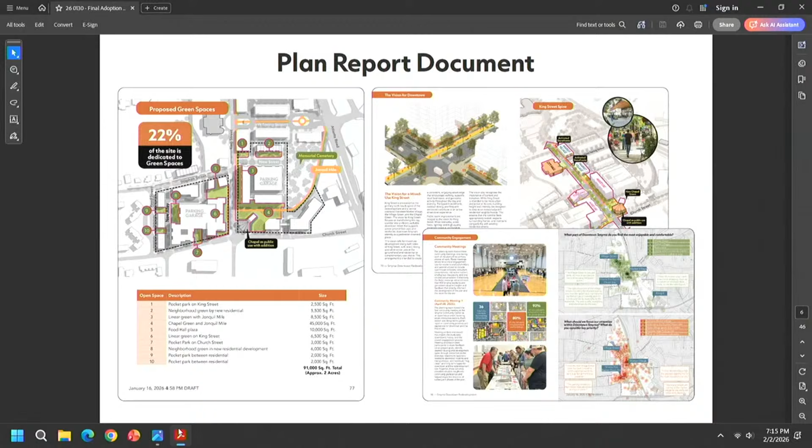The plan is very graphic. All of the graphics I'll show have additional information in this report, going into greater detail on the types of things I'll discuss at a higher level today. I think one of the main things about this plan, and honestly one of the joys in working through this process, has been the engagement process and the great reception we've had from the community.

We held 3 community meetings, all at the community center. The first meeting alone had 250 people. We had about 200 at the second community meeting, and 150 at the third. We also had a project website, Downtown Smyrna Redevelopment. Over the life of that website, we had about 13,000 unique visitors who visited the website about 20,000 times.

We also held interviews and roundtables with stakeholders - about 70 stakeholders across 15 focus group meetings. We did 2 online surveys with about 3,200, almost 3,300 responses total. The first survey alone had 2,000 responses. These are huge numbers for online engagement.

One of my favorite parts of this process: we had 20 project ambassadors. These are dedicated folks from the community who volunteered their time to go to community events, attend our public meetings, staff the sign-in sheets, and really become champions for the process. Some of these folks are here today, and it's been a real joy working with them. With the help of ambassadors, we attended the Taste of Smyrna and the Jonquil Festival, chatting with about 300 or so folks. So about 17,000 voices engaged in about a year of work.

So really fantastic things. Some of the engagement that I'll share today will be focused on the feedback we received at the third community meeting in mid-November, where we shared this vision for the site, and folks told us what they thought, what they liked, what they didn't like. I'll share some of the results from this last meeting. So I'm going to start by talking a little bit about the vision for the site.

As we all know, the First Baptist Church site is a fantastic redevelopment opportunity for the city. It's really a once-in-a-generation opportunity for you all to double the size of downtown. Very rarely does this type of contiguous land right next to your walkable core come up for redevelopment, and very few times do you have the opportunity to purchase it and then shape how it continues to grow.

As we think through the redevelopment, one of the things that drew us most to the site was the historic chapel. As part of your purchase agreement, this chapel is to be preserved and reused as a public use. We think the chapel is the heart of any future redevelopment. It has been part of the community for more than 100 years, and it really becomes the focus of any future redevelopment for the site.

It's what brings it its authenticity and will ground it and help anchor this district. We think there's an opportunity to do an expansion to the site that still honors that historic architecture. I'll share a little bit about how that can be placed, but really showcase and open up the chapel from what is currently a hidden back side into a future green space.

The other organizing element for this vision relies on connectivity. One of the things people told us through this process is that they do not want to see an old downtown and a new downtown. They wanted everything to feel part of a single experience. For that, we are proposing what we're calling the Jonquil Mile, though it can be shaped later into any nomenclature. The point here is a really high quality trail that is beyond a path. It is a linear green that connects the Market Village, your village green, to the rest of the site.

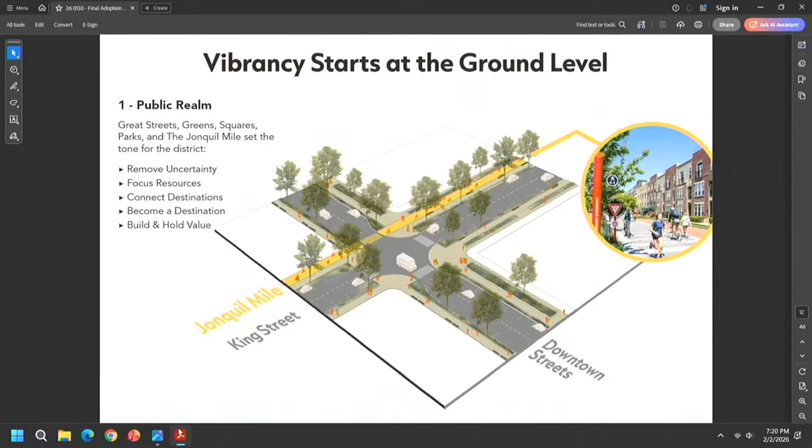And really set the tone for the redevelopment, whether your investment is in place through the Jonquil Mile. What this signifies to the development community is that you have a high-quality public realm that needs to be matched with a high-quality development. That vibrancy doesn't end at the sidewalk -- that only sets the tone. However, the vibrancy is really crucial at the ground level.

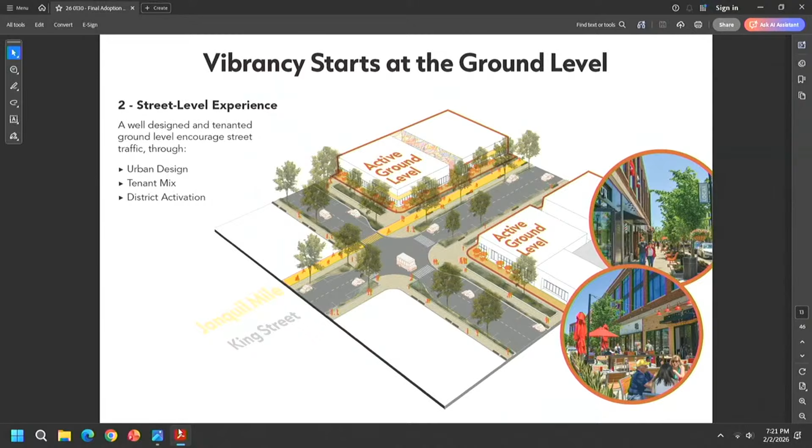And this is where you can influence the future development. You want a well-designed ground level that has a great mix of uses, has good urban design, so you have something interesting to walk to that encourages meandering. And you have to work with the development community to have a solid tenant mix that really brings in the types of businesses that the community told us they like to see, and businesses that contribute to what's already here in your Market Village, where you have a great collection of longstanding businesses.

And to make that happen, what happens above the ground level is really crucial. The development that occurs there, whether it's residential, office, or hospitality, can all be influenced by you all, but will be shaped by the market and by the development market.

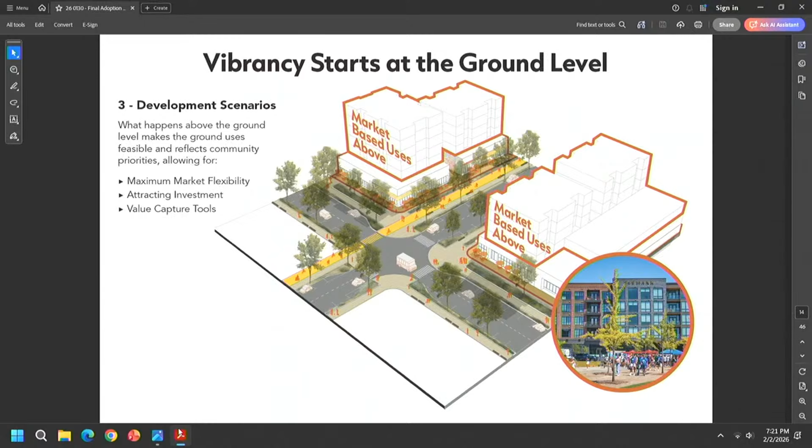And what happens there will allow for that ground level to occur in a way that you all wanted, in the way that the community told us that they'd like to see, more restaurants, more retail, and more local businesses. And we know that to get to this, you have to have a little bit of market flexibility, because people told us they want certain things and expect certain high-quality things from this development, especially after a process like this.

We heard from the community, the number one thing they'd like to see, more restaurants, more retail, making downtown a destination, bring in high-quality dining, more things to do downtown. How do you make this work?

It really is by bringing residents and housing to the site to support some of that redevelopment, make it feasible from a development perspective, have an appropriate amount of parking and a well-connected downtown, making sure that people can conveniently park here. It doesn't have to become a parking district, but it has to be convenient and easy and intuitive. And then to support the redevelopment, think through other complementary uses like hospitality or office that will support those businesses during lunchtime or during slower times when residential or visitors don't support it. And this is at the back of our head as we think through all of the designs.

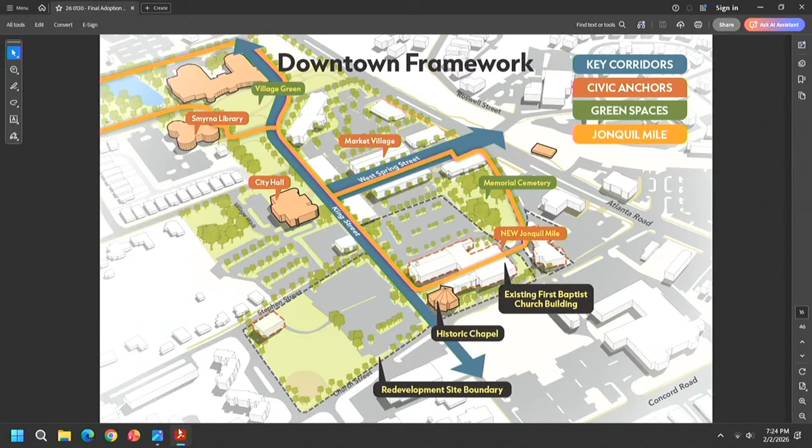All this comes together and is connected through what we're calling the Jonquil Mile, which is the line you see in orange moving through downtown. We see the investment in the Jonquil Mile going through King Street, through the heart of the redevelopment, up Memorial Place, right by Memorial Cemetery, then through West Spring Street to the Market Village, connecting the site to the Market Village, and then up King Street toward the Village Green, connecting the pond and the Arboretum back to the site. This is a connective tissue that will bring all of downtown together.

So the vision for the site is a nexus of all of these ideas coming together. It's a mixed-use spine on King Street. It's the idea of bringing the Jonquil Mile through downtown, anchoring redevelopment around the chapel through a new chapel green that's connected to the historic chapel.

All in all, the massing that you see here is conceptual. This is your starting point for you all to engage with the development community. What we're showing here represents a site redevelopment that will add about 350 new homes to downtown, about 8 to 12 businesses, a food hall with about 4 to 6 restaurants, and a hotel near the corner of Church and Atlanta that has about 120 rooms.

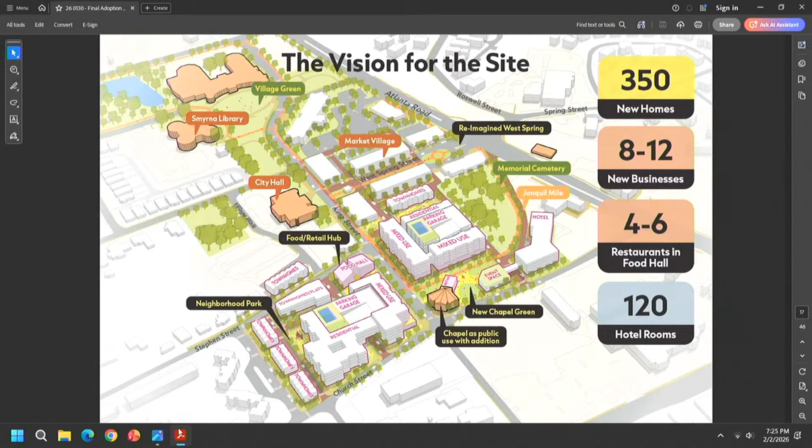So I know this is quite a big graphic to start with, so I'm going to break it down into some smaller areas and talk a little bit about what they mean. However, I know one of the key things you all want to know about, and the community told us about, is housing. So when we talk about 350 new homes, I want to be very clear that this is a mix of for-sale residential and opportunities for rent as well.

So we're showing massing that includes some townhomes, some flats, as well as some multifamily apartments. And the reason for this is the development strength that you all have here in the region to attract some of these uses.

You have really great comparable rents in the area that are supporting one-bedroom units for $1,800 or two-bedroom units for $2,100. You've got really healthy housing ecosystems supporting single-family homes or townhomes between $415,000 to $500,000. So really great comps that will signal to the development community there's a lot of opportunity.

350 homes might sound like quite a big number, but in the grand scheme of things, as you look at other developments in Smyrna, it's actually quite similar to other concepts, at a density more suitable for downtown. The Sync Apartments at Jonquil is about 290 multifamily units, and the Belmont development is about 274 multifamily units, plus 215 single-family homes. So this is not an unprecedented amount of residential to add to downtown Smyrna, but it is a significant investment that will bring a lot of new activity.

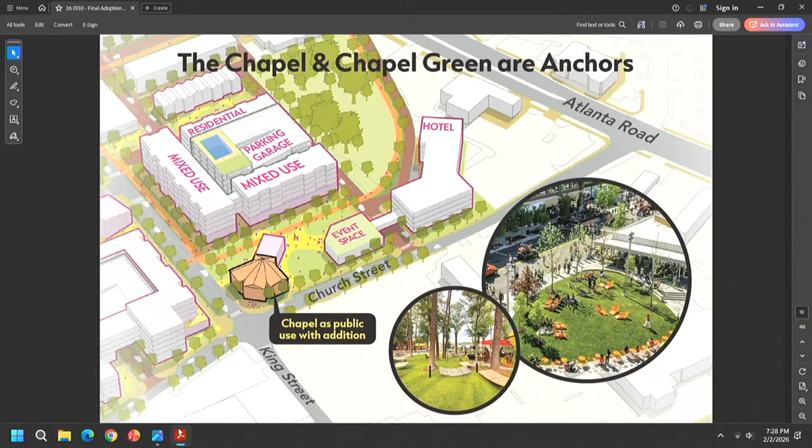All of this is centered around the historic chapel. The chapel, in our own assessment and in talking to the community, is the heart of any future redevelopment. The way we envision redevelopment happening is really opening up the area around the chapel and then focusing redevelopment around a new chapel green that highlights this historic structure, opens it up with a glassy or contemporary addition, and really becomes more of a front lawn for the redevelopment, bringing about an acre of green space. Then you can have things like mixed-use buildings with parking behind them, perhaps an event space connected to a hotel, all centered around this new investment in green space.

As we think through how this can be reimagined, our vision for this area is really opening up this portion of downtown, making it a southernmost gateway for your downtown, honoring that historic architecture with a contemporary addition that brings light and energy into the site, perhaps adding things like a coffee shop or a visitor center or some sort of business that brings a little bit of life and activity to that green. And then having redevelopment front that green, bringing eyes on that space, and having the Jonquil Mile connect right through that green space as well.

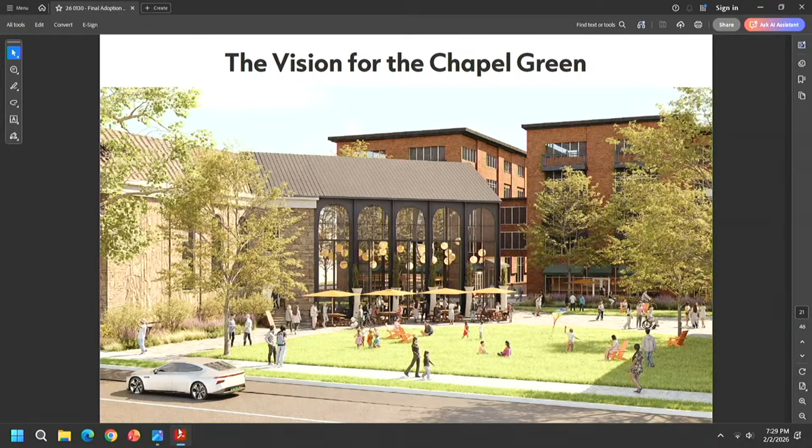The other main element of the concept is King Street. King Street is one of your key corridors for downtown. It is that north-south corridor that really connects all of your key assets, your city hall, the library, the village green. It brings that all together. So we see King Street as a really fantastic opportunity to make it a walkable, vibrant corridor and really support the businesses that are already on King Street, then bring that energy south toward the redevelopment site.

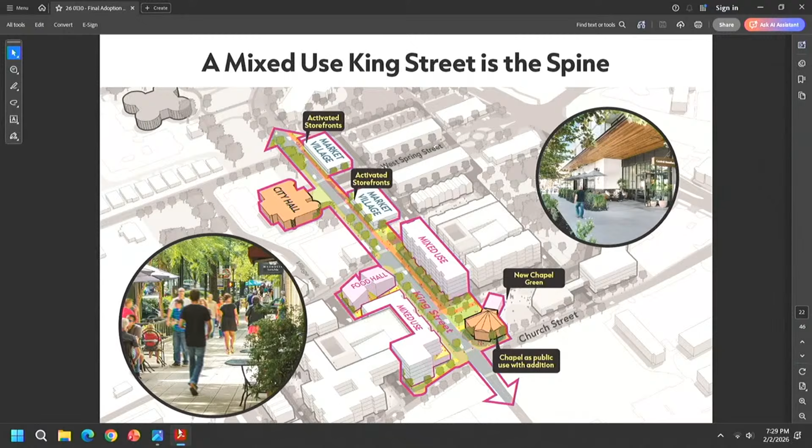Things like a new food hall facing King Street, mixed-use buildings on both sides of the street, the historic chapel and green space addition, and then the investment of the Jonquil Mile on King Street itself. King Street today is a really great connector, but it's not living up to this opportunity. Despite being one of the only north-south corridors that are walkable through downtown, the walking experience on King Street is a little bit lacking today.

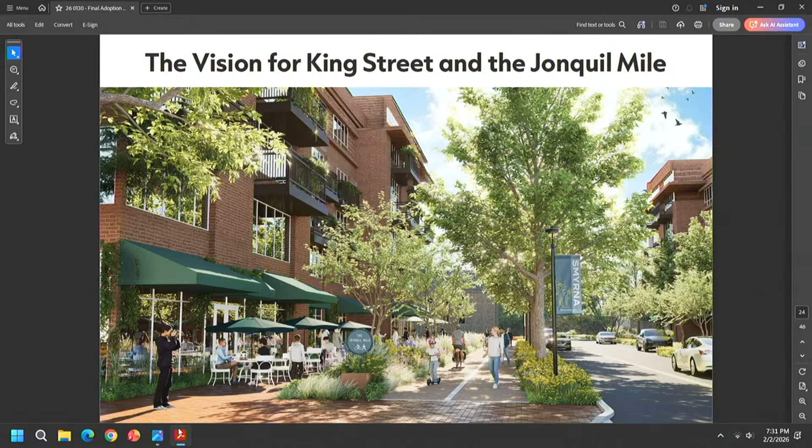So if we were to rethink King Street with the investment of the Jonquil Mile and mixed-use retail on both sides of the street, what that can look like is a completely different corridor that really highlights more of what Smyrna can be. A really generous 12 to 15-foot path with landscaped edges on both sides of the street, great tree canopies, of course jonquils, and great signage, wayfinding, lighting, opportunities for businesses to front ground level retail, that great tenanting mix we talked about, and then having balconies and residential on both sides of the street, creating eyes on the street and making it a little bit more of an active corridor.

Mixed use is great, and as a planner, we appreciate that, but we also have to acknowledge that downtown is in the middle of a residential area and surrounded by residential. We heard a lot from the community that they wanted to make sure any future redevelopment doesn't feel like an intrusion of multifamily or density into the surroundings.

They wanted a blend that really gradually built up to the density. So one of the things we do in our concept is show that gradual density as we move into the single-family neighborhoods surrounding downtown.

If you look at the graphic, you see some townhomes or flats facing Stephen Street or Reed Street, with a little bit of green space in between any multifamily and the townhome frontages. It's really to create that gradual blend into the existing residential character of the areas around downtown, and really bring some of that neighborhood feel to that edge.

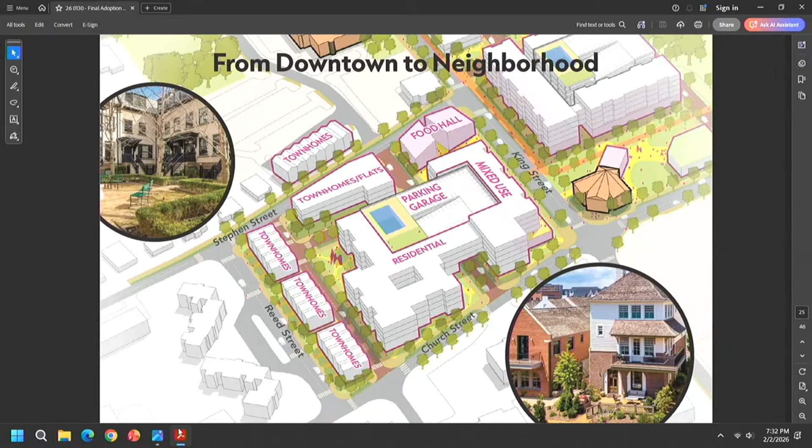And I want to be very clear that people expect high quality architecture from this development. This is a pivotal redevelopment for you all, and as such, it needs to look and feel like a high quality redevelopment.

People told us they'd like to see a balance of for-sale and for-rent housing. Like I mentioned, something that includes apartments, but crucially, the opportunity for townhomes, condominiums - things the community wants you all to work with developers later in the process to figure out a good mix.

But all in all, people told us they are more comfortable with density, more comfortable with change, if the quality of architecture matches what is currently in downtown and kind of hits the moment for what downtown can be.

So I'm going to pause and talk about what folks told us about this concept, then we'll talk more about connectivity and mobility. In our third community meeting, we talked with 150 Smyrna residents, and they gave us feedback on what they liked about the concept, how we can continue to improve it, and then we asked them to rank it from 1 to 10 on how closely it matched their vision for the site.

What people liked about the concept, there was actually quite a bit. People told us they liked the walkability of it, that they really enjoyed the Jonquil Mile and the connectivity, the green spaces in particular. There's a lot of support for the plazas and open spaces.

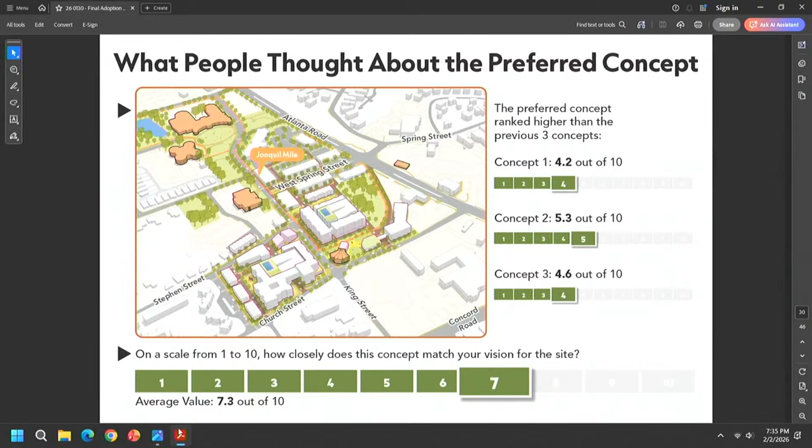When we asked folks what they thought about the preferred concept on the ranking from 1 to 10 - originally we asked this in our second public meeting when we had three concepts, and those ranked about 4 or 5 out of 10. We were really glad to see the preferred concept ranked significantly higher, at 7 out of 10, which is a really positive thing to see as part of a process like this. We also asked folks what they thought about King Street.

People told us that they loved the walkability, the outdoor dining, the Jonquil Mile. On things they'd like to see improved, they told us they'd like to see more of what's already there, so more bike parking, more space for outdoor pop-ups or dining. And then there are still some concerns about how this works during rush hour, and there are some design elements you all can consider, but of course, King Street is not meant to be an arterial road.

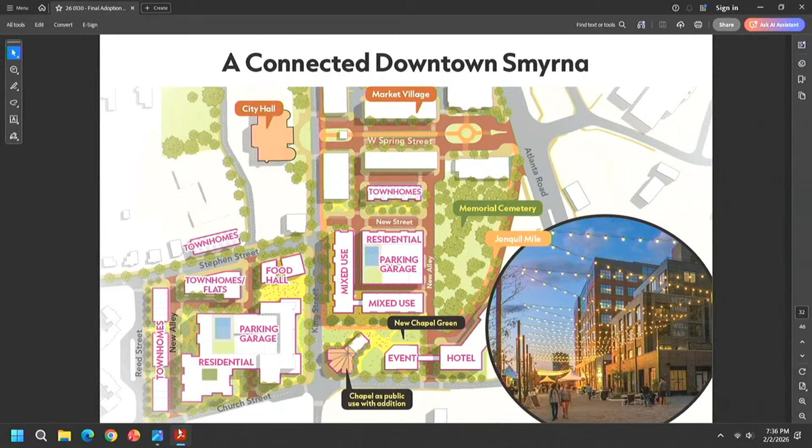It's a low-stress street for walking and biking through your downtown. Connectivity is something we'll continue to hear about, and this is a conceptual design, but this is something we want to make sure, as you work with a developer, to ensure you continue to see this site as an extension of your downtown and something that remains well connected. You do this by creating internal streets, by creating alleys, by placing your parking so it has multiple access points, and by continuing what is a great strength of your downtown, which is the fact that it has such a great interconnected street grid.

I mentioned green space a couple of slides ago, and one of the things people really liked about the concept was the green space. One of the key plays in connectivity is having a system of green spaces that connect folks from your Market Village down to the Village Green. The Chapel Green is 1 acre, but overall we're creating about 2 new acres of green space through this site redevelopment. Compared to the Village Green, that's about 3 acres. We're about two-thirds there. However, we're breaking it up into smaller pieces because these are smaller, more intimate greens.

You already have the big event lawn that you can host your big events, and you already have your landmark green space. The purpose of these green spaces is to create more intimate neighborhood moments, places where you can work with a development community to have your development create great little courtyards, pocket parks, neighborhood greens, things that feel special and unique.

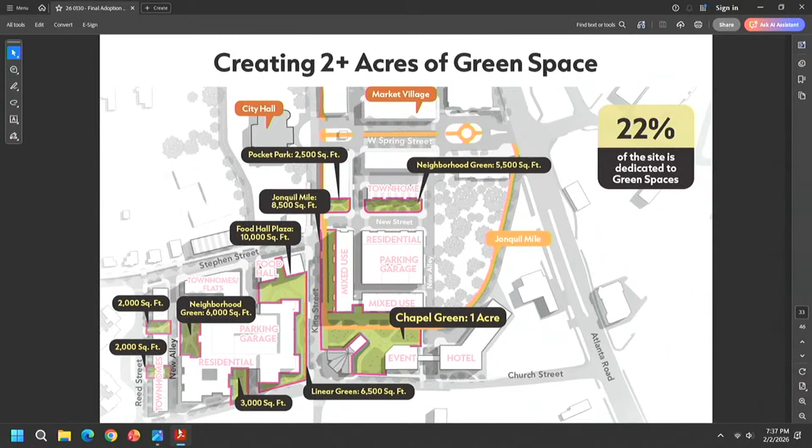All of this works together in what we think is an improvement to your downtown circulation, both for walking and for driving. So as you consider redevelopment, one of the key strengths in your downtown is that it already has a connected street grid. You have streets that go through; what you want to maintain is a street grid where you don't put all of your inbound and outbound trips to one single road. So you don't want a super block type of development funneling all your traffic to Atlanta Road. You want to make sure you have internal streets and internal alleys that connect folks from Concord and Atlanta down through your redevelopment and well-placed through to your parking structures.

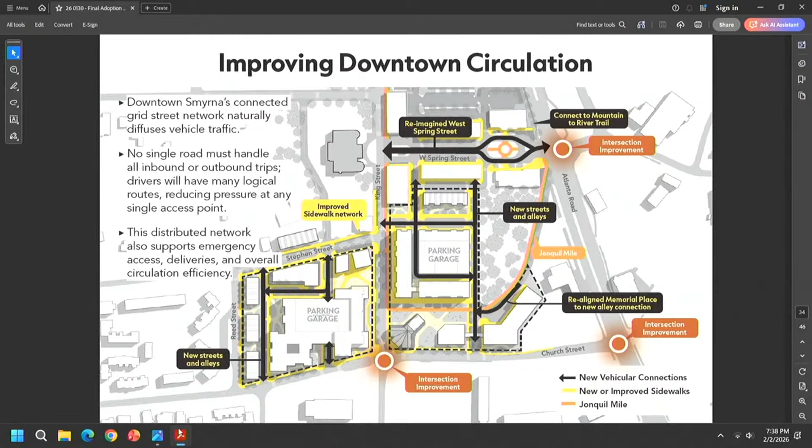Parking, as we see it, has to be accessible from two different locations, has to be visible but screened so it doesn't feel like you're just driving through a parking district. I don't know about you all, but when I visit a great place, I don't really remember how easy it was to park. I remember how great the space was, but I do remember if it was really tough to park. There's a little bit of a balance.

But the main element here in a mixed-use development is that it's not encouraging you to drive, it's encouraging you to walk. And that's one of the key drivers here in our concept: the idea of the Jonquil Mile, the fact that you're having a mix of uses. All of this is to encourage folks, if they're driving, to drive and park once and then walk through your entire downtown. And you can do that if it's a good environment.

Feasibly, if you come and visit the site, you could park in one of the parking garages here, and it's a 5-minute walk to the Village Green. Similarly, if you're parked further north in downtown, that's also a 5-minute walk. What doesn't encourage that walking is if you have a poor pedestrian experience where it's not an intuitive walk, or if the walking experience isn't great. If you do have a great mixed-use development, about 30% of anticipated trips can be non-motorized, because you've got residents, office visitors, and visitors from the hotel. All of those folks won't necessarily need to drive in to access some of these businesses as well.

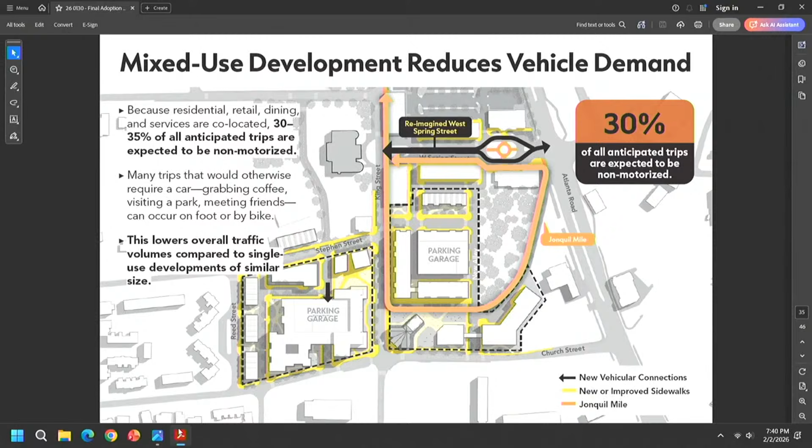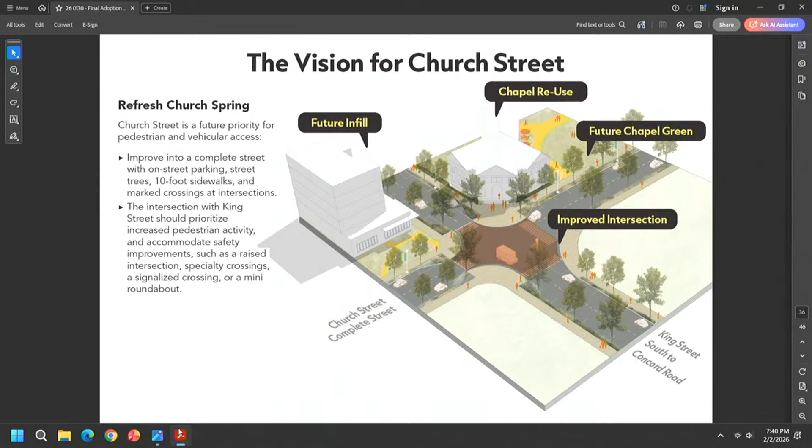Lastly, I want to talk about a couple of your key streets that you want to make sure you invest in, one of which is Church Street. As an east-west connector toward Atlanta Road, Church Street will see a lot of infill development with the site, and it will also see potentially some stress in your transportation, especially as you get closer to the intersection with Atlanta Road. You want to consider some of this traffic, and you want to continue to have a great walkable Church Street, taking some of those elements on King Street and making sure they're incorporated along Church Street so it continues to feel like a walkable road and not like a southern edge. You don't want your downtown to end at Church Street. You want it to feel like a great connector.

From the very first meeting, people told us about not wanting an old downtown and a new downtown. The easiest way to feel like you have a dated or old portion of downtown is by not investing in some of your more mature portions of the district, and that is really West Spring Street. You have a really great corridor with restaurants, businesses, and people who have been there quite a bit of time. How do we make West Spring Street feel better connected to the new investments to the south? There's an opportunity here to refresh the streetscape and bring a little more life. Our understanding is that some of the streetscape is actually toward the end of its lifespan, so you'll have to invest in it soon regardless.

There's a real opportunity here to make it a more usable space, both for events and for daily use. As we were chatting with folks as part of this process, they told us it feels unsafe, especially with kids playing in the median. There's not enough space on the sidewalks, with cars moving through, so there's a real opportunity to make it feel like a better street with more safety.

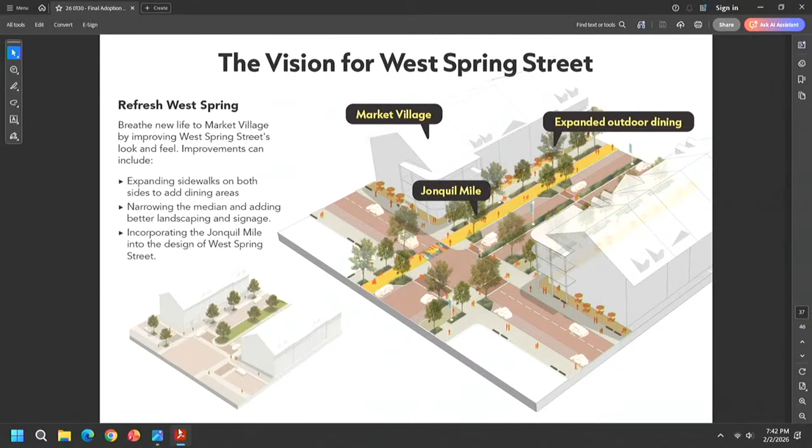Our vision for West Spring Street narrows that median from 22 feet to 4 feet. You can still have a great landscaped middle with some lighting and signage and great landscaping, and then you take that excess distance and apply it to both sides of the street, expanding the sidewalks on both sides, and perhaps bringing some of the character of the Jonquil Mile through the heart of West Spring Street, making it feel connected to the investments happening elsewhere on the site.

When we shared this with folks, they really enjoyed this vision for West Spring Street. People told us they liked the idea of having more outdoor dining, revamping Market Village, and wider sidewalks. We did hear comments about pedestrianizing West Spring Street, but ultimately, in our own expertise, we think that would actually be detrimental to some of the operations there. You have businesses that depend on road access on West Spring Street for their servicing, and there's no alleys there, so this solution really allows you to keep things like on-street parking and outdoor dining while still having the street function for the businesses that are there.

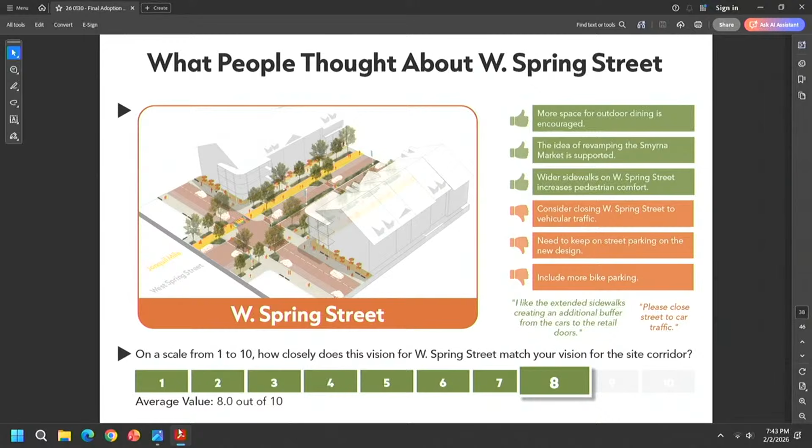Folks told us that it very much matched their vision for the site and the corridor, about 8 out of 10. So we heard quite a bit from the community through this process.

Toward the end of the third phase, some of the things I want to leave you all with as you move toward working with a development partner: one, retail and restaurants. That is crucial, we heard this over and over again, folks really want to see that type of use in the redevelopment. Number two, housing, and having a balance of housing. People really want you all to work with the development community to have for-sale products and for-rent products as a balance. Three, traffic and parking, that will continue to be a concern, something you can ensure is well designed so it doesn't overwhelm your transportation. And fourth, people really want to see investments like the Jonquil Mile and the green spaces as part of this. This is what brings life and character to the development so it doesn't feel generic or like it could be anywhere in the metro area. This is something that will really make it feel like it's only here in Smyrna.

So with all the inspiration, I do have to leave you with a little bit of an action plan to bring the inspiration and make it a reality. The last few pages in the plan are what we're calling the action plan. This is your implementation section. It is a little drier than the rest of the plan, there's more words, but this is really important for us and for you all to take this vision and make it a reality.